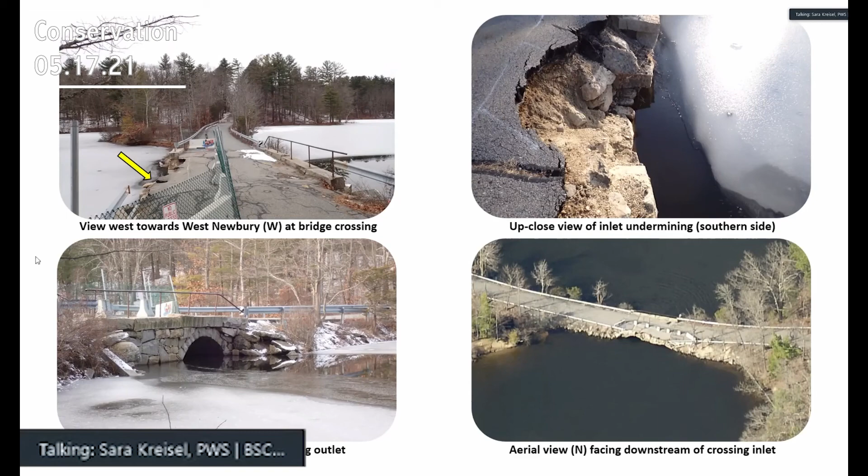The roadway and bridge were originally constructed over the Artichoke River in 1891. The area was later dammed up and became the Artichoke Reservoir as it exists today. The bridge crossing itself straddles the municipal line between Middle Street, West Newbury, and Plummer Spring Road, Newburyport.

The project occurs 0.7 miles east of the intersection with Garden Street, West Newbury, on an existing paved road, which is classified as a rural local road. The nearest house is more than 750 feet away. And while the roadway is flat, removal of some small trees along the slopes down to the reservoir will be necessary for access and construction.

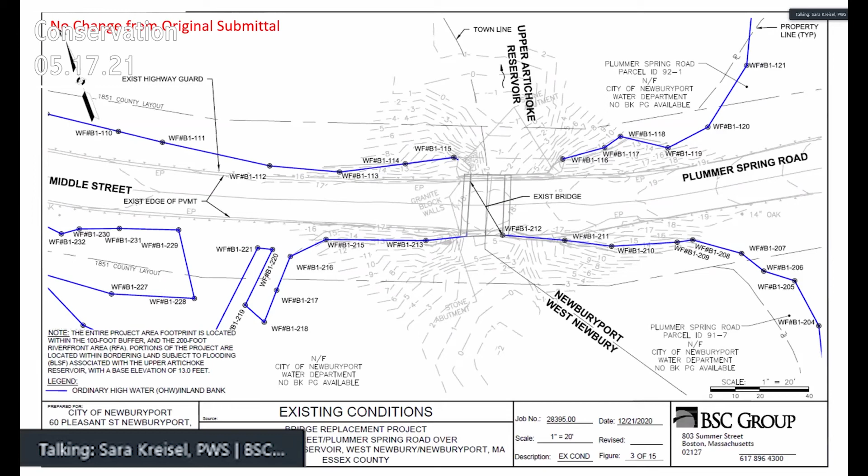The existing structure is a single span earth-filled stone arch and is approximately 14.3 feet wide, 13.2 feet high, and 24.2 feet long. Portions of the bridge, stone headwall, and southeast approach roadway have collapsed, and the paved roadway foundation is undermined. The Upper Artichoke Reservoir flows northerly in an open water area and is bounded by protected forest lands.

While bankful width for the Artichoke River is 28.4 feet, as reported by StreamStats, the reservoir itself is much wider. The minimum width for stream crossing standards is 34 feet, but the proposed new clear span is 41.5 feet. The stream bed near the crossing is characterized by sand and cobbles with trace amounts of silt and gravel.

The crossing is located within Zone AE for the 100-year storm event at and below the 13-foot base flood elevation. The Artichoke Reservoir is a Class A public water supply and outstanding resource water. There is no rare species habitat in the project area, and neither the Upper Artichoke Reservoir nor the river are EPA impaired waterways nor cold water fisheries.

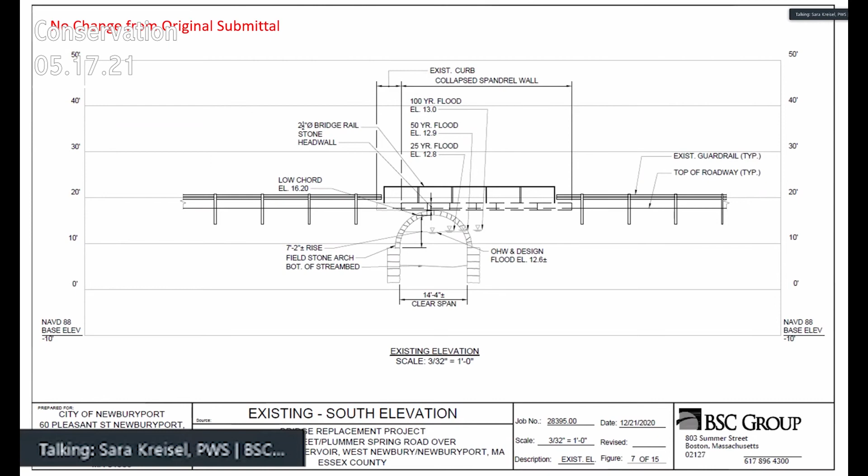The proposed project is characterized as a redevelopment project, but will preserve undisturbed areas adjacent to the crossing to the maximum extent practicable. The proposed project design complies with the Massachusetts stream crossing standards as required for a limited project under the Wetlands Protection Act.

The crossing is proposed to be replaced by a precast concrete structure that will follow a similar horizontal and vertical alignment as the existing bridge, which will continue to have an open bottom with natural stream bed material. The proposed span length will increase from 14 feet to 45 feet. The overall width of the bridge will be 32.5 feet to accommodate safety improvements, including a sidewalk on the southern side, in accordance with the MassDOT Bridge Manual for a rural local road.

Sarah, can you go back to that other one and explain what the changes are from the original submission? Sure, I was actually just about to get to that. Do you want me to go through that and we can circle back to specifics if there's any details you need? Okay, you continue. I just wanted to check, if you're going to address it at some point, that's fine. Absolutely, I just wanted to make sure. It has been about 4 months since we presented before the commission, so I wanted to make sure everyone had the background information.

Okay, so in accordance with the MassDOT Bridge Manual for a rural local road, the proposed bridge has been designed to meet the 10-year flood frequency storm event, can accommodate the 100-year flood frequency storm event, and increases the hydraulic opening by a factor of 2 compared to existing conditions.

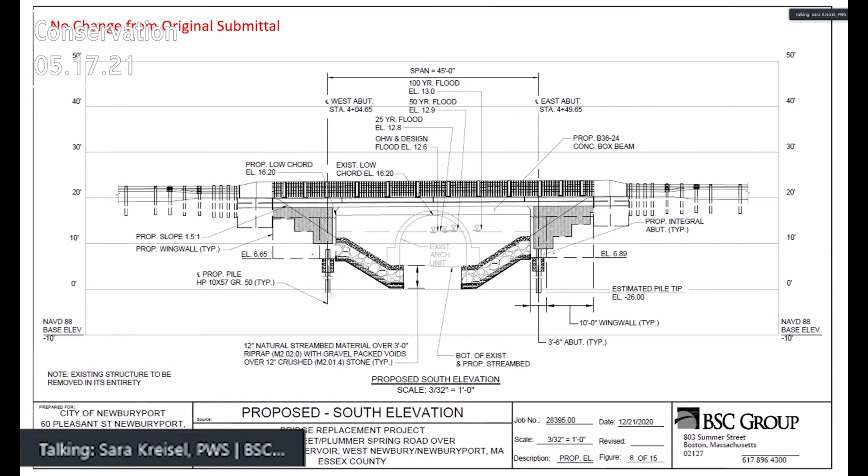Proposed impacts to the wetland resource areas have been minimized to the extent practicable, and all temporarily impacted areas will be reseeded with an appropriate seed mix. As a quick summary of impacts to land under water, bank, and bordering land subject to flooding, they will all remain the same as proposed in the original submittal from January 2021, and will be restored, replaced, or even increased to the extent practicable within the project area.

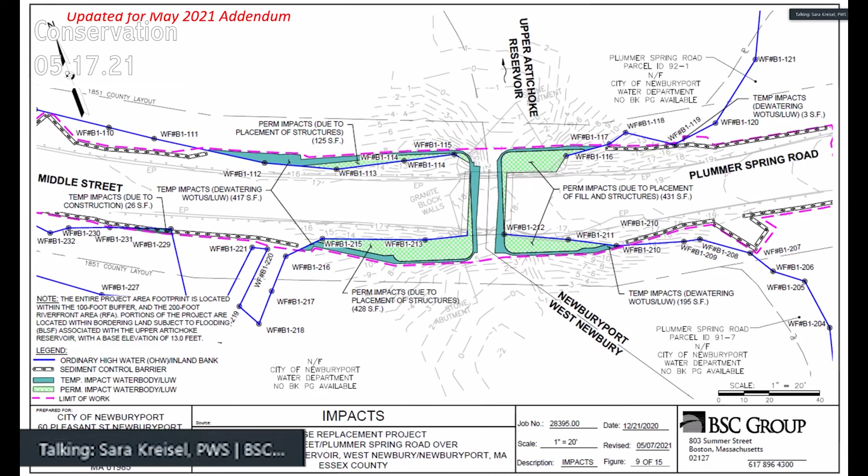No BVW impacts will occur as a result of this project, as there are no BVWs in the project vicinity. Impact calculations to riverfront area have increased slightly, approximately 74 square feet, with the new water treatment elements, and now approximately 2,060 square feet of permanent impacts to riverfront area are proposed in West Newbury. Temporary impacts in West Newbury will actually decrease 18 square feet from previously proposed numbers as a result of a minor configuration of the stormwater improvements.

Erosion sedimentation controls will be installed prior to construction to protect the waterway and will be removed upon completion of the project once the site is stabilized. Work will likely occur behind cofferdams so that the work can occur in the dry, but the exact methodology is up to the contractor. As discussed in our last hearing, the contractor is to prepare dewatering and stabilization plans, and they'll be required to submit them to the Conservation Commission for approval prior to the start of work.

The lowest point of the project occurs within the roadway on the West Newbury side of the project area. Currently, the drawings had shown 2 deep sump catch basins at the low point of the project on either side of the roadway that flow to a drain manhole and discharge to a stone splash pad. Our change now is that these deep sump catch basins will flow to a 900-gallon water quality treatment unit, and from there the runoff is directed northwest to a flared end section that discharges towards the reservoir and onto stone.

So these are the 2 catch basins, and they will flow to the water quality unit and then onto the flared stone end section. The project limits will generally stay the same as what we previously proposed. No additional berm or curbing will be included. Between the deep sump catch basins and the water quality units proposed in both municipalities, more than 80% of the total suspended solids will be removed from runoff captured by the catch basins across the entire project area.

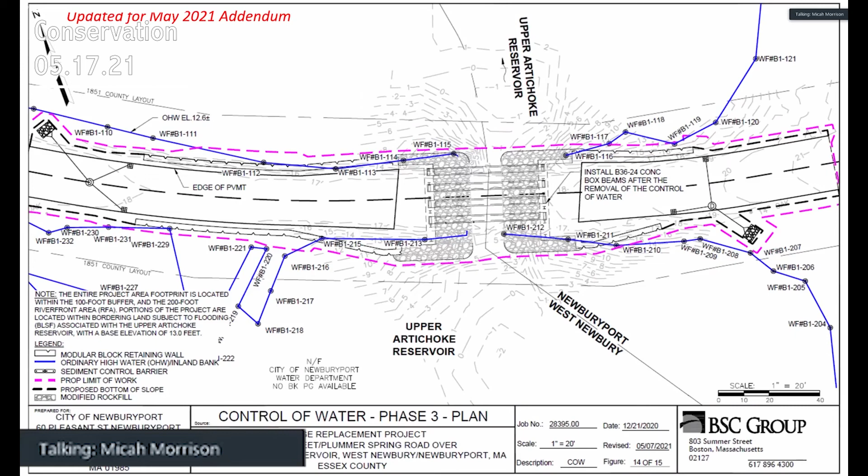So we would have siltation fencing. Let's see if you can go back a couple - right there. So in different phases, there's going to be different siltation fencing, and it could be coir logs or sedimentation - forget the name of them. But that's what's depicted here: during each phase, we'd have the area that's being worked on surrounded by sedimentation fencing, and coir logs - I forget the exact name. You mean like 12-inch coils? Yes, I'm blanking on this one, yes. Proposing having them backed by any silt fence? We can do that, yes, that's easy enough to do.

So they won't need those catch basins for additional pickup of sediment? No, not generally.

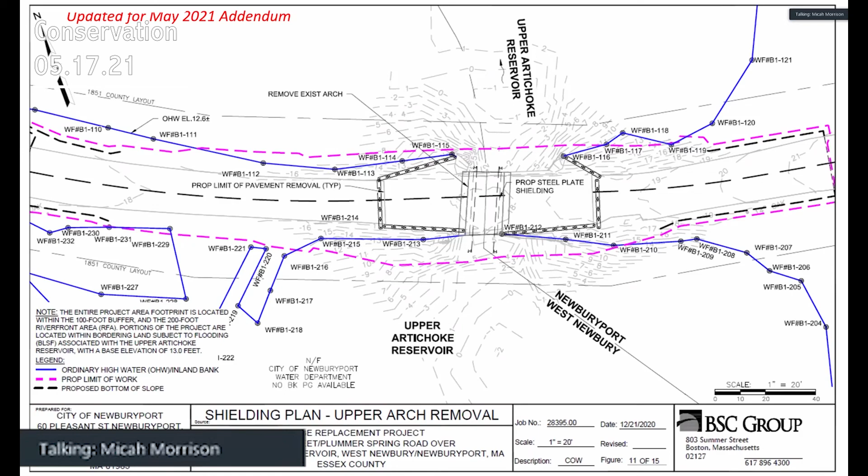There was also talk of a sidewalk. Is that what I heard, on one side? You are correct, there is a sidewalk. Where is that on this plan? I don't see that. Oh, I see, okay - just on the south side. Yeah.

Will you be able to add the berms to a plan soon? Yeah, I think we can at least show a cross section. A Cape Cod berm is only about 2 to 3 inches high. It's just meant to direct the water along, and it's not meant for anything related to traffic. So that's what was discussed. Do those last long, if it's only 2 to 3 inches high and you have trucks and stuff going over them? The way we've discussed it internally is we'd want it under the guardrail so that the plows wouldn't come and take it out. So this has been kind of a discussion.

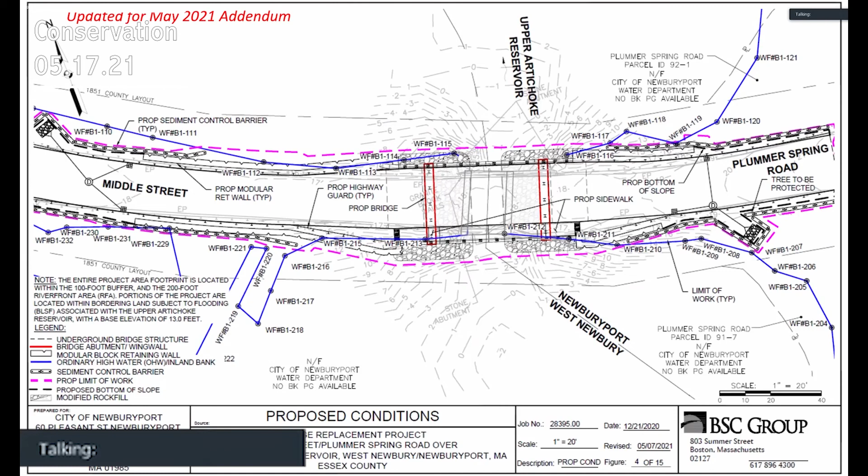So this will be continued to June 7th. And we are back. Next on the agenda is a continued hearing for 64 Bridge Street.

Good evening, Mike Seecamp here, Seecamp Environmental Consulting, representing Kenneth Cutcliffe, project proponent.

We had a site walk on May 9th, a Sunday, and 2 commission members were there. We reviewed the wetland line on both sides of the wetland and discussed dewatering methods, and it was requested that I put a description in writing. So I revised the project narrative, and additionally it was decided that we should identify the trees that would need to come down for digging the trench, the temporary impact to the wetland. I went back out and looked at that, and listed them in the revised narrative, which I sent along. Hopefully you folks have received that.